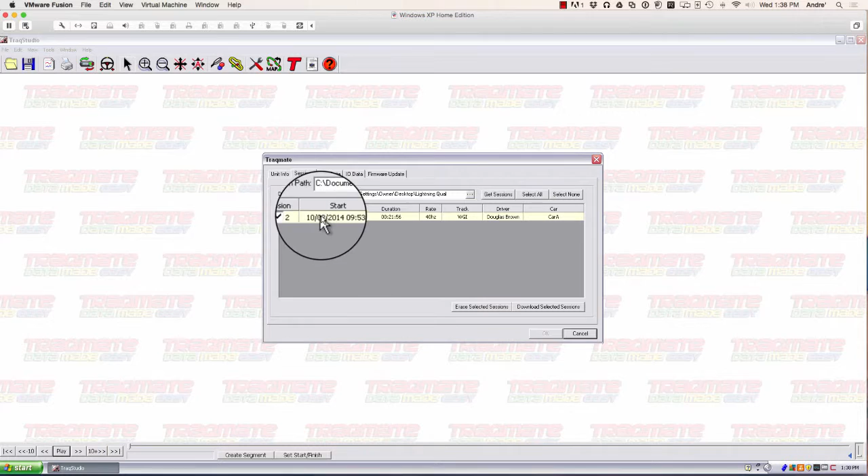So in this case, we have a system connected already. Just go ahead and hit connect, and it will pop up the window here and give you your files. At the top here, you can determine where you want to save this. The first session, typically at the top, is going to be the newest session, and you can erase the sessions here if you want to later on, but we'll just go ahead and download it now.

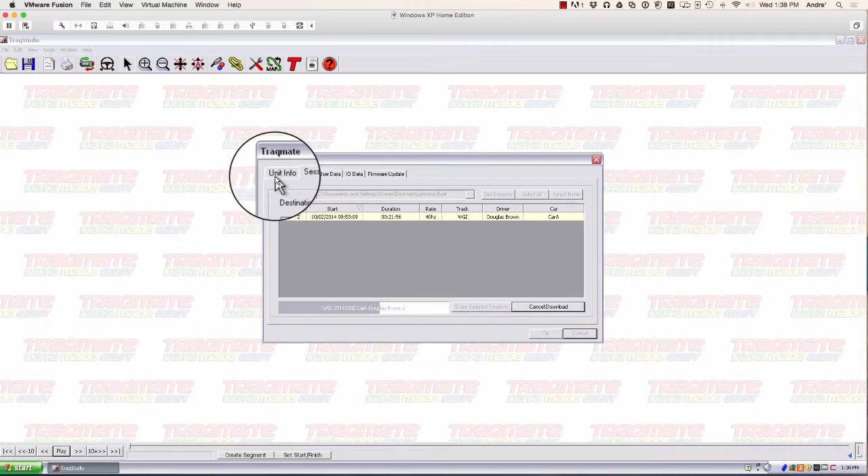If you need to make any adjustments after you're done downloading, you can change the track here, the I/O data, which is any kind of data inputs like sensors and things. And this is all done for the Classic and Basic. All the other adjustments are done on the TraqDash itself for that product.

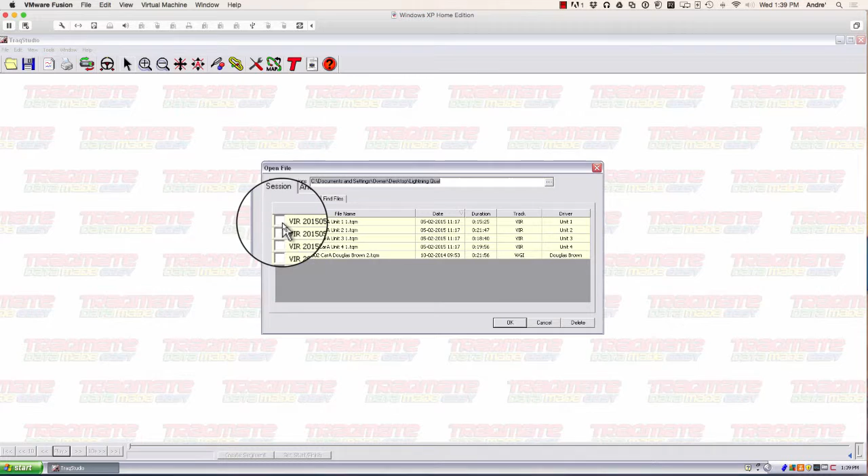Alright, once that's done, we hit OK, and then go back up here to Open. And we have some files here already selected. These are good comparison files, so I'll just go ahead and pick these. Let's just assume we're comparing 4 different vehicles. So here's your session. This shows the folder where it's at, and we'll just pick those. We'll assume we downloaded 4 different Traqmate files, and we're bringing them all up here.

Alright, first thing that comes up is a setup window. It shows you have different tabs here: Unit 1, Unit 2, Unit 3. That's the different Traqmates that you've collected data from. The first unit that you load your data from will always be the default. Everything will be basically based on that.

And from there, what you want to do is pick the distance graphs, and select horsepower versus distance. A lot of times I also do speed versus time, or horsepower over time, things like that. But in this case, we're just going to do horsepower over distance. I like to do velocity over distance as well to kind of give me an idea where they are.

And over here on the bottom, you want to click Car Setup, and assuming all the cars have been weighed, you basically want to enter in that weight. In this case, I don't know the weight of all these cars, but we'll just say 2,000 pounds. Every car is going to be a little different, but ideally they'd be pretty closely matched if they're all in the same class or the same type of car. And that obviously can affect the horsepower to some degree.

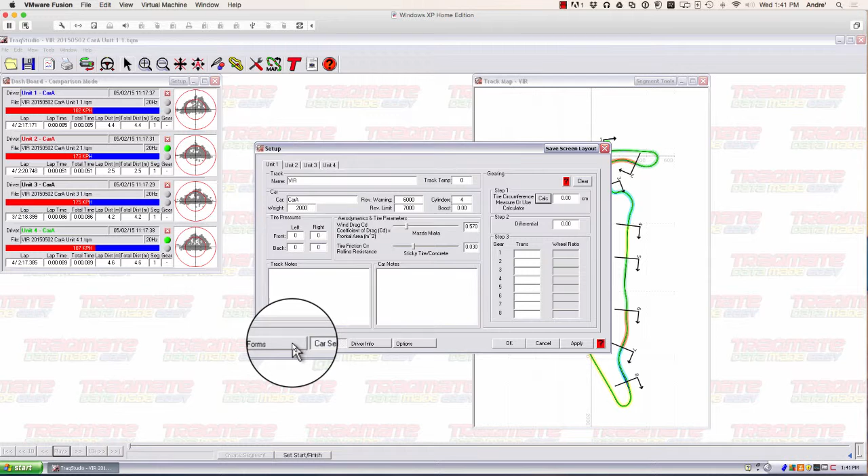If you're dealing with a lot of aero, you can change some of this aerodynamics and things like that. But for the most part, you're really not looking for an exact number. You're looking for comparative data, and that's really what the Traqmate is designed to do, to give you an idea of how two similarly spec'd cars compare to one another. So we go back here, hit OK,

and then you're brought up to the by distance menu, and the horsepower over distance. And right away, you'll see that the green car, Unit 4, is significantly faster than the other cars in the session. Now let's go over to this comparison mode, and you can actually see the kind of lap times this guy's putting down. He's putting down 2:17.305. The other car here is 2:17.1 in blue.

So the green car is clearly making more power, but the blue car is actually turning the faster lap time. This is fairly common. The guy who can't drive as well has got the faster car.

So in this case, it's pretty obvious as you're looking at these graphs here, as speed increases, this is basically speed over distance, as they accelerate along here. And in the case of the green car, they all basically start accelerating about the same time, but he just starts really, really pulling them down the straightaway.

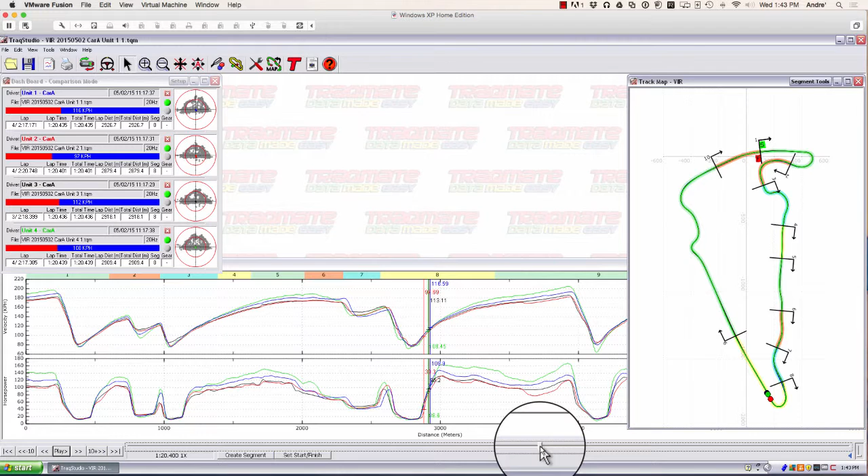So we'll go, and the real key is you use these controls down at the bottom to kind of slide the traces around, and you can hit play controls down here as well. What I tend to look for on a track is going to be a level area. So I'll look at this area here coming out of Oak Tree, even though it's not quite level. Yeah, it's not really ideal for this, but you can do it here as well, sort of coming onto the

straight there. And what I'll look for a lot of times is the horsepower for one thing, but I also look at the acceleration, entry speed, and exit speed. So you can get a general idea pretty quickly if the weight and everything is entered correctly and there's no massive aero differences between the cars. That's a pretty quick telltale sign.

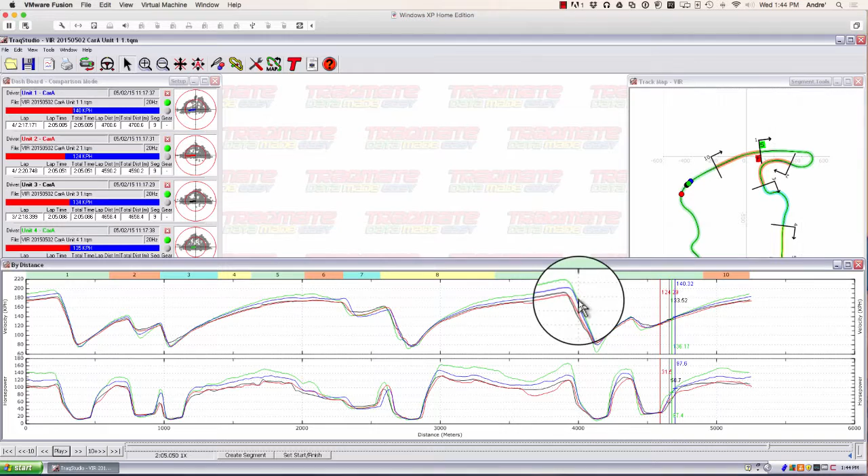And you can also see, just in data analysis wise, when someone gets on the power sooner or carries more speed. So up is acceleration, down is braking on this graph. So he accelerates harder, he has to brake more there. Same situation here, he brakes more. And then, where this blue car is actually faster, he's braking later and harder than any of these other guys are. The same situation here. He's typically just the better driver, or the car is set up better.

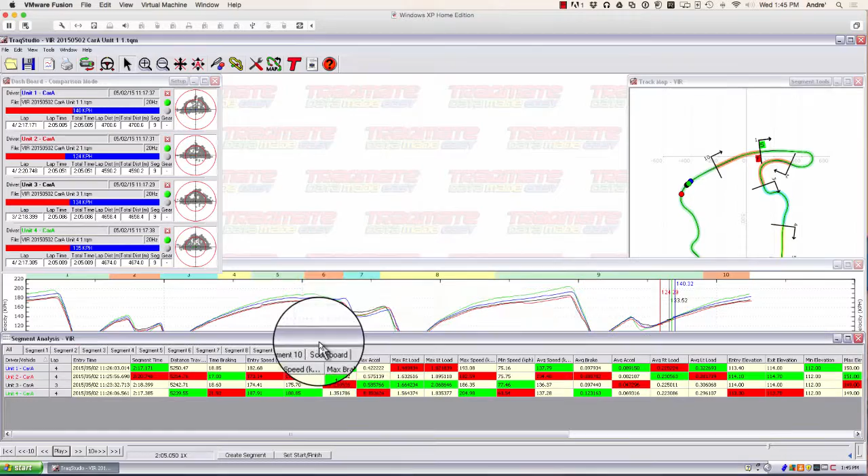So let's look at entry speed, exit speed, and see if we have any red flags with this session. So you go back up here to setup. Setup is sort of the key to getting all your information. So you can see the different lap times here. And what I'm going to do on this one in particular is go to segment analysis. Click segment analysis. That just gives you this graph here that pops up, and it looks slightly intimidating at first, but it's really not that bad.

Segments are created around the track. They automatically create, and you can move them and do whatever you want to them. They're really easy to manipulate. So in this case, we're just going to say, all right, that's segment 8. And let's put another one over here. You can either drag an existing one or create new ones using the segment tools up here. We'll just use what we have here to start with. And I'm just clicking and dragging around until I get it where you're trying to capture an area of the track.

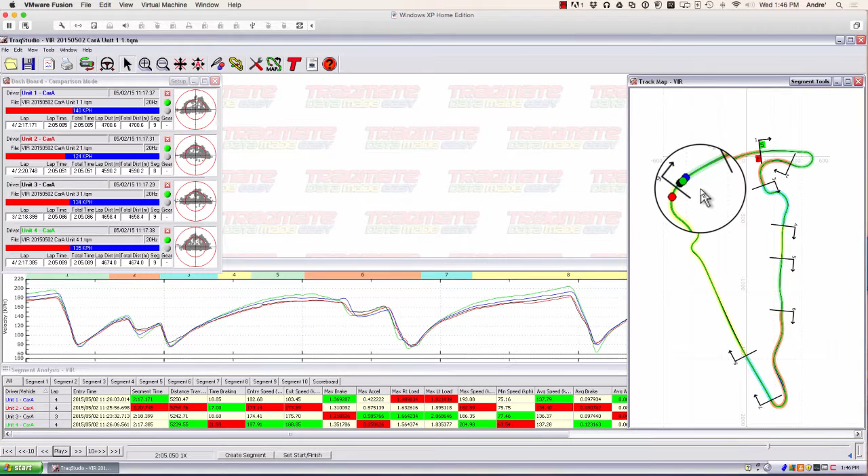So you want to say, okay, they entered at this speed, they exited at this speed. Sure, it's like trap speed on a quarter mile or something. If you enter in at the same speed and whoever exits is substantially faster, they've probably got more power. And that's just kind of how that works. It's not too bad. So all the segments are numbered, 7, 8, 9, 10, and so is this. So in this case, we're going to jump to segment 7 on the segment analysis down here. And what I'll look for is the entry speeds and then the exit speeds.

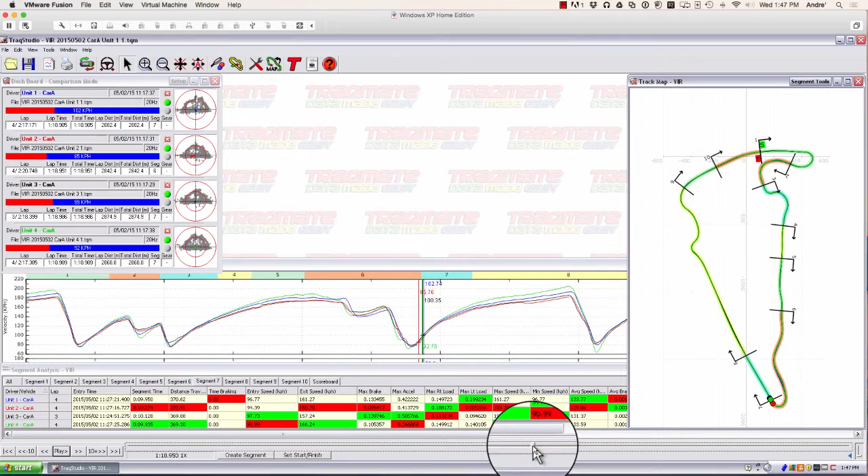Now this is in kilometers, just because that's the way this computer's set up. But you can drag this to see it a little bit more clearly. But this ought to give you a pretty good idea. This car here, the green car, Unit 4. So Unit 4, way back here, if you drag it, he enters this segment at a whopping 90 kilometers an hour, so it's about 60 miles an hour. We'll just say 90 and use that as the reference point. This other car entered it at 97. The blue car, which is the fastest lap time, entered it at 96.

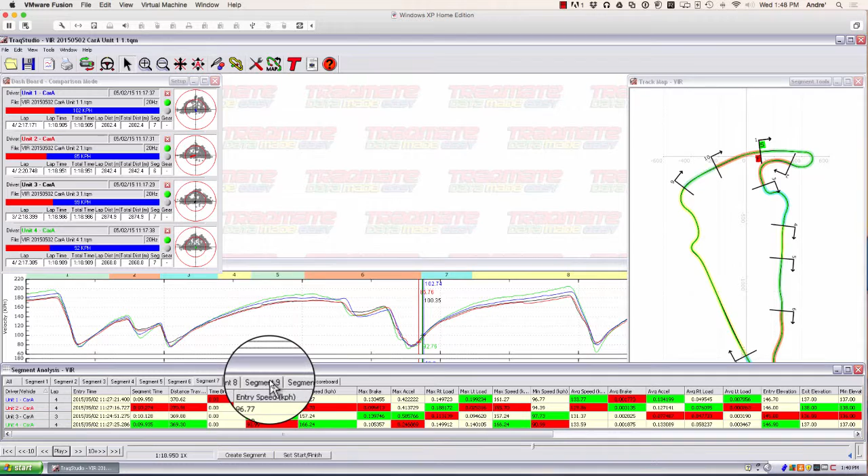So clearly this driver in the green car is not that great of a driver in comparison to the other people in his class. But then look at the exit speed. So the blue car here, entry speed of 96, exit speed 161. This one 97, 157. So the blue car is pretty healthy. I would consider that a good baseline, but this green car here, he entered in the slowest and exited substantially faster than the other car. That's a pretty big red flag for me. I would love to see his dyno, or we don't know the particular weight of this, so that may be part of it too.

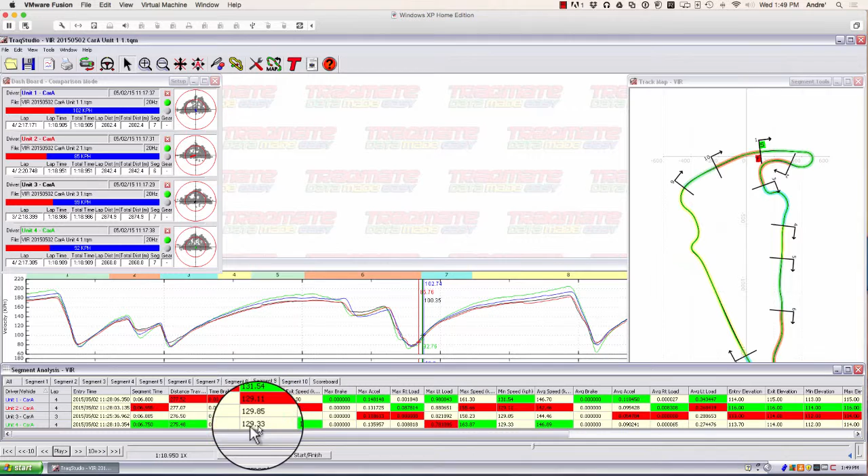But again, let's go to segment 9, which is over here. Kind of see the entry speed. In this case, the fastest lap driver had a great entry speed and exited at 161. Little slower entry for the green car, but again, exited faster.

So that clearly indicates to me, and looking at the horsepower as well here, that if these cars are all in the same class and they're the same type of car, clearly something's going on. He's got substantially more horsepower, and enough to want to see his dyno and compare that, and talk to the other drivers and see, what's going on out there on the track? Is he just pulling past you guys and everybody's going full throttle?

And a good demonstration of that will be, just look at the track map here. We'll hit play and you can actually watch. Okay, they're all coming out. Oak tree, accelerating. And the green car's starting to creep up. It's probably into third, maybe even fourth at this point. And he's still pulling, and he pulls past everybody. He's pulling right on past.

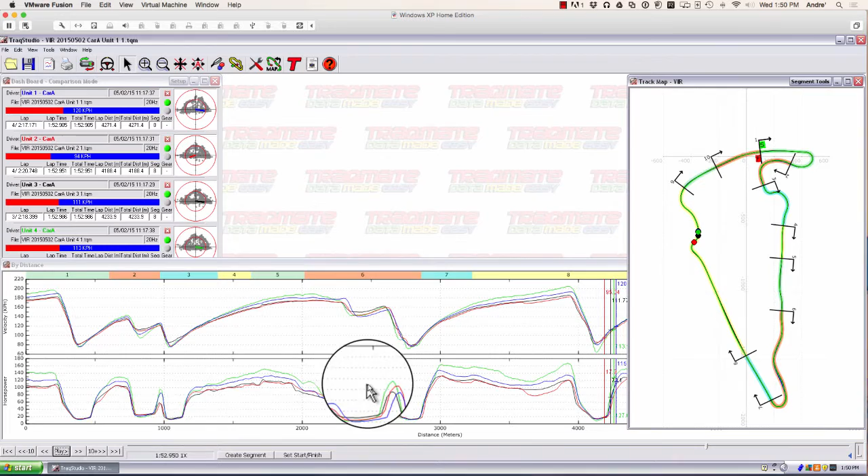And if these are all in the same class, keep in mind, he had the slowest entry point here and the fastest exit here. So that's a pretty good indication that something was going on with that car. So you can print these out if you need to, show the driver, or you can also save the data. If you save or save as, you'll be able to use that data later or have it for comparison.

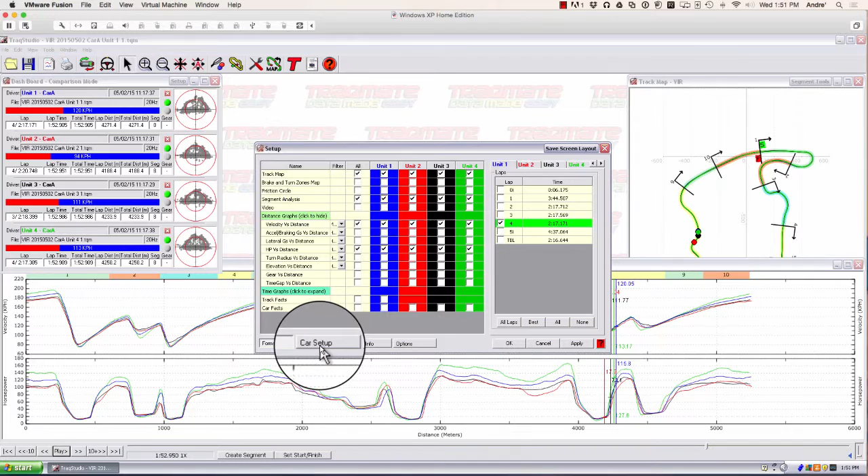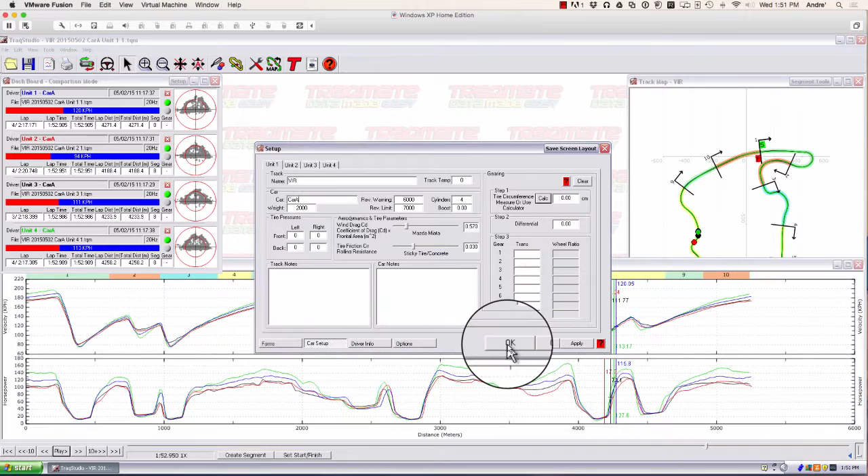It's a good way to also, if you want to, go into the setup window here, under car setup, you could put in the name of the driver or the car. You could change that. Obviously make sure the weight's correct. Any notes you want to input there, driver information, you can change that for the driver, or you can enter in the car here, like the car number. And when you save that, then you'll have an analysis file for future reference or for better comparison.

Say if you have a driver in a known good car that has a known horsepower, you can save him and then pull in your suspect driver's file and easily compare it to that baseline that you know is good, and find out what's going on where. Again, the real thing to focus on is location on the track. You want to be typically second, third gear before aero really kicks in.

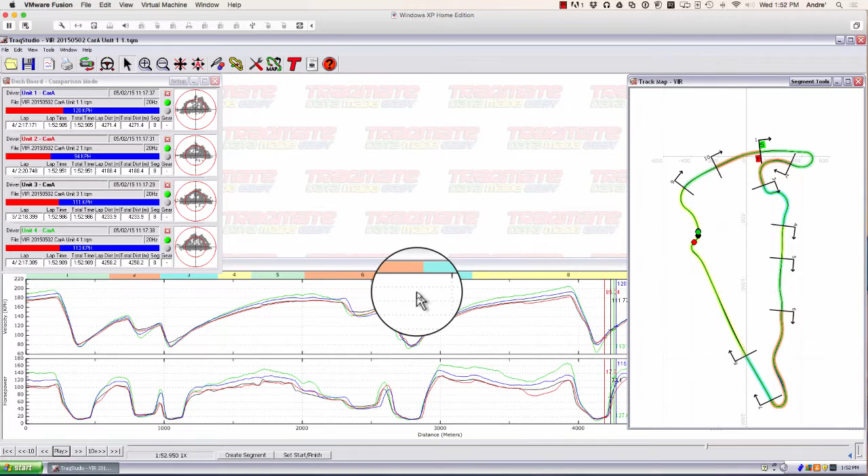Ideally, you want to try and be as level as possible. You want to make sure you get accurate weights after they come off track. You want to make sure the TraqMate is mounted level in the car. If it's not level, the data won't be accurate, so throw it out because it's not good. You also want to make sure the antenna is outside the vehicle so you get clear reception. And it's good to use this as a tool. This is a piece of data, but it's not the end all be all.

Dynos are there for a reason, and there may be other factors here. There may be gearing going on. If that's legal in the class, that can change a lot. Maybe aero stuff that may be legal, if these are two different types of cars, that can change a lot. In terms of the rating, they may actually have more power, but their aero slows them down enough to cause them to be even and leveled out with somebody else.

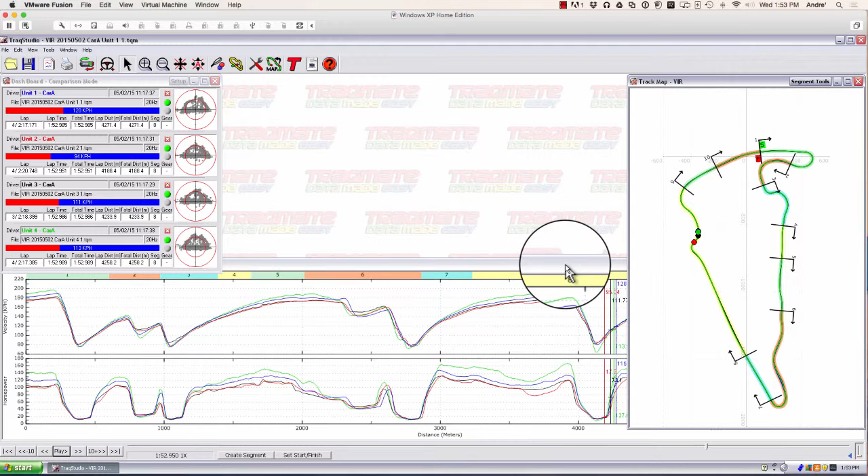The smart drivers are going to build their engines for torque and acceleration on the bottom end with NASA's horsepower rules. So anybody who's really fast is probably going to get out of the corners faster than the next guy, and his engine's going to be built and designed around these rules that they have set up. So it may be throttled down or have some kind of restrictor plate, but built for torque. So that's just something to keep in mind when you're looking at all this stuff.

The smart guys are going to figure out a way around some of it, but I think the main goal is to let them know that they're being watched and monitored, and hopefully not just have somebody like this who's a total outlier, who's probably placed second or third in class because he's maybe not the best driver, but he's got the most power.

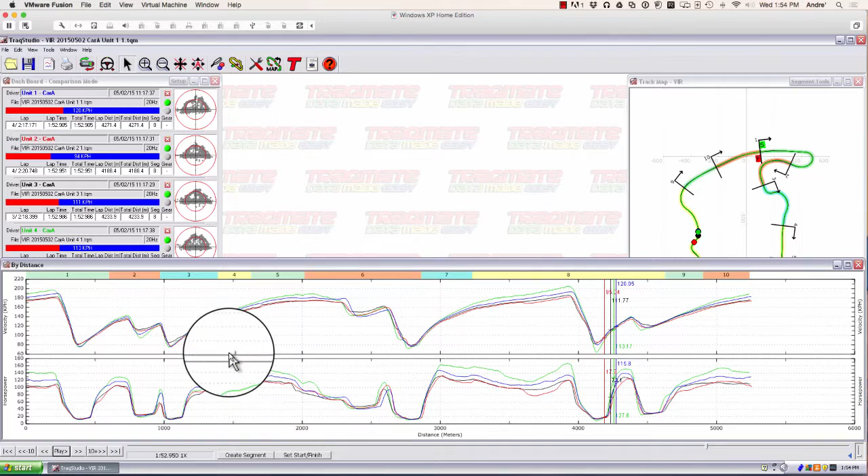So that's about it. Once the session's done, you can close everything out. I recommend clearing off the systems every chance, since having too many files on them might cause confusion. Keep them charged up, and just keep them in rotation, and your data will be accurate, and keep them up to spec. So that's it for this.